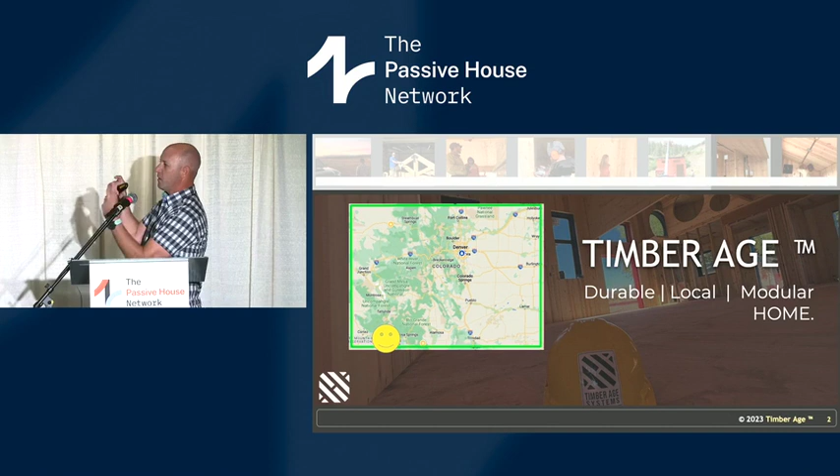We're Timber Age Systems. We make durable, high-performance, modular, panelized homes in Durango, Colorado. The best part is that we often go from the forest to our factory and back into a building in less than 40 miles. Everything we do fits underneath the smiley face you see up there on the map.

I get the privilege of telling you how Timber Age started. I have an 18-year-old who's in her first year of college. I want everybody to close your eyes and view yourself as an 18-year-old. The fact that there aren't many people in here under 18 is something we should probably consider. Think about your 18-year-old self — would they be surprised at all about where you're at right now? I know my 18-year-old self had no idea what I was going to be doing at this point.

I graduated with a degree in aquatic ecology, then taught high school for a while, and then jumped into manufacturing, which is really what I am. I'm a manufacturing geek who discovered Passive House because of the problems I'm trying to solve in my life, and you'll hear a little more about that.

The best part about all of those things is I got to work on really amazing teams, and we did great things together. I had organizations that invested in me, and mentors who changed the way I look at work and life forever. It shaped how I think about what it is to be in a place and belong to a team.

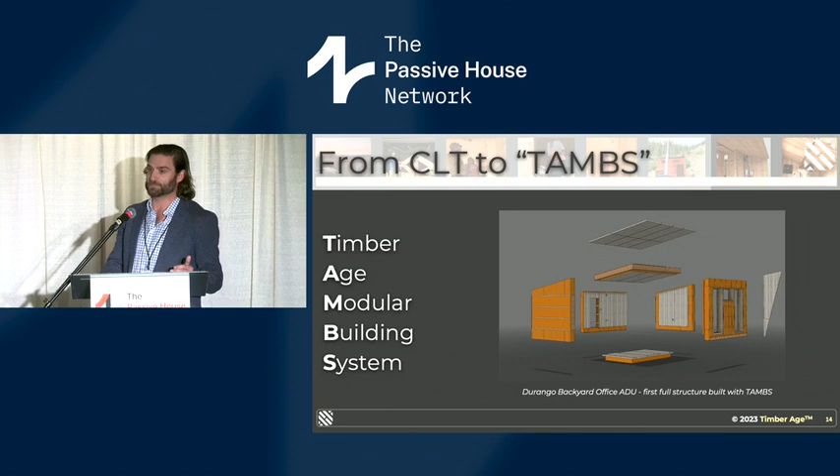In early 2023, we rolled out the next phase of Timber Age, the Timber Age Modular Building System, or TAMBS, as we like to call it.

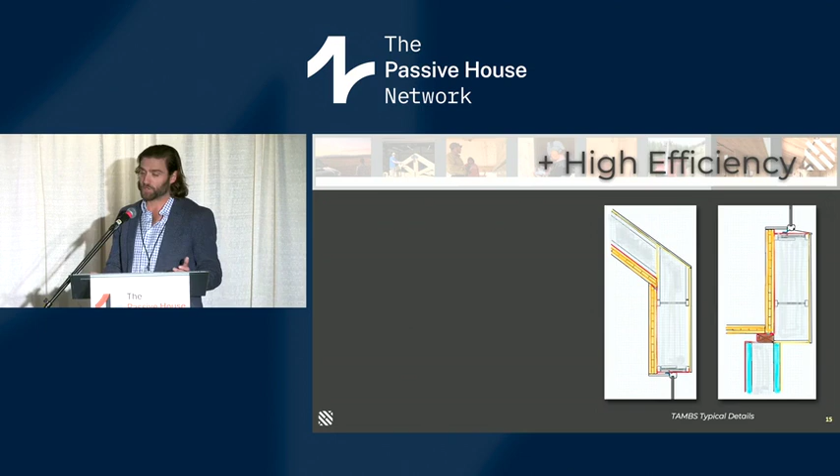Most of us here are building science geeks, at least we're aspiring to be. We have to consider the efficiency of the design and the operational carbon of our buildings. But too much focus on assembly performance prevents a balanced consideration of the total impact of a structure on the environment. And that total impact is super easy to measure, right? No, unfortunately it's not super easy to measure, but we have to try.

One of the more tangible ways we've chosen to consider this tough idea is to focus on miles traveled per pound. If I can produce structural wood, which is a pretty heavy component, from only 15 miles away, isn't that a little bit better than 1,500 miles away?

While we understand the embodied carbon discussion is far more nuanced, and I think Chris can help us out with that a little bit more, I think we can all at least agree we need to start with metrics that are easy to measure. But regardless of the metrics, we need to use both lenses to achieve the greatest impact in the shortest period of time.

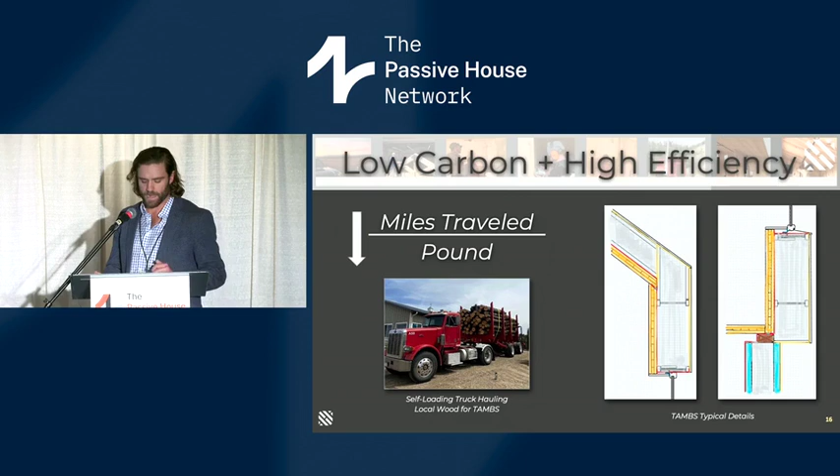A big part of why I'm here today comes from working with Passive House at scale in New York City for many years with Steven Winter Associates.

Modeling the performance of large buildings is critical to facing the climate crisis, but as I'm sure many of you know, the number of variables in the data can be overwhelming. The timeline and the carbon-intensive materials can be very daunting.

It left me searching for more control over the process. I began to wonder, how can we build housing quickly enough to keep up with a growing population and do it with a laser focus on energy efficiency and embodied carbon?

But also, how can we get people excited and educated about passive house and low carbon construction as fast as possible? Obviously, there's no silver bullet, but after a few months of searching, I came to the realization that CLT, and in particular small-scale CLT production, has the incredibly unique ability to approach these problems and bring together a few of the things that I was already very passionate about.

CLT is—we love Venn diagrams, by the way, if you can't tell—easy to standardize and manufacture with the use of CNCs and modern technology. It lends itself to durable passive house construction. And if done on a small scale, it has the ability to utilize local, low-value trees and aid in our fight against the growing wildfire crisis.

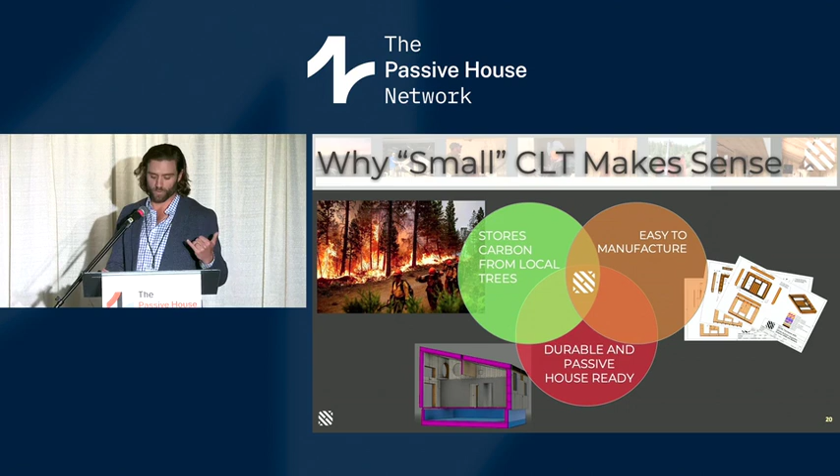This relationship is incredibly exciting to me. But after years of trying to sell and educate about passive house, I've learned that it's time to bring in the big guns if we're really going to move. And nothing sells better than Instagram.

CLT just looks and feels good. We now understand the health benefits of biophilic materials in our living and workspaces. And when that material has a cool story, is fun to work with and design with, and makes you feel good, that is something people can really get excited about.

So what do I mean by easy to manufacture? Developing a manufacturing process around CLT is incredibly efficient. Our shop drawings dictate how our assemblies go together, but our CNC transfers the majority of our instructions right onto our 5-foot by 10-foot CLT panels. All of our insulated wall, roof, and floor assemblies get built in a similar way.

A vapor open air barrier is adhered to the CLT, and wooden I-joists connect the individual panels together. This cavity then gets wrapped with our vapor open weather barrier and filled with 12 inches of dense pack cellulose to achieve about R52. With this level of control and pre-planning, projects get installed and weather sealed in days instead of months, and the efficiency is built into the system and is preserved.

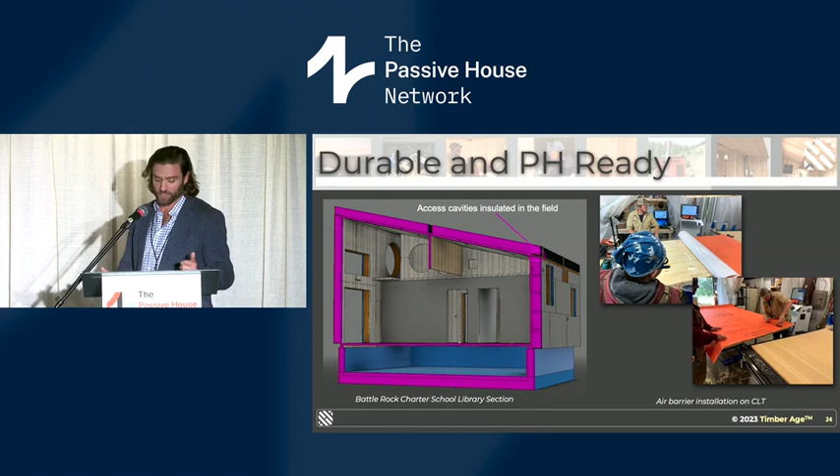Now there's no wonder why so many designers have chosen to combine CLT construction and passive house, even those who aren't just completely obsessed with whatever the Europeans are doing. Having a continuous thick structure creates a very effective substrate for applying an air barrier and provides an uninterrupted structure for attaching insulation with minimal thermal bridging.

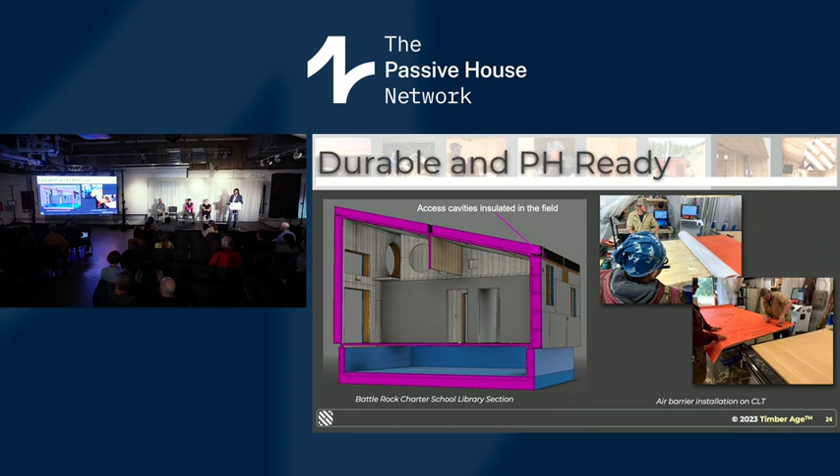But on top of all of that, the ability to utilize wood that would otherwise have gone up in smoke, and still touch and feel this beautiful material for the life of the building, is hard to beat.

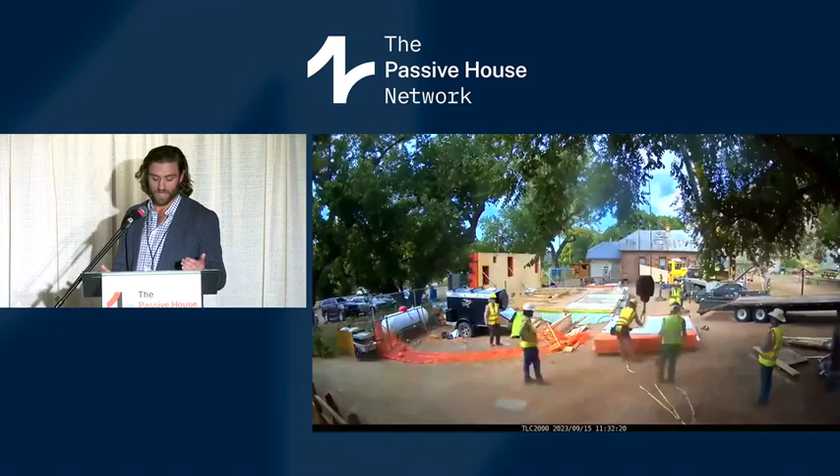This building we recently installed will be the library for students of the Battle Rock Charter School near Durango. The whole building went together in 3 days with windows installed and weather sealed. Barely any trash was produced, and the only stressful feeling we had was that we may have had too many people on site.

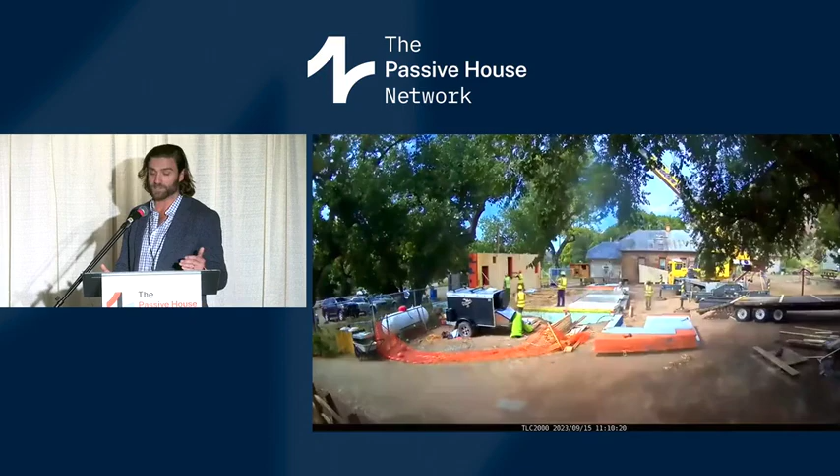Needless to say, the students and teachers are ecstatic about this library, but the people who enjoyed it the most were the installation team. And that's not a beer in my hand, that's a seltzer.

We also know that our system lends itself to the growing interest in small backyard ADUs. This backyard office was recently completed in Durango after making a quick trip to Washington, D.C. for the Innovative Housing Showcase put on by HUD.

Housing and Urban Development, thanks to funding from the U.S. Forest Service, where we were able to share our story with our representatives in Congress, as well as the general public.

Next month, we will be building our first certified passive house, the Hemlock House, that's going to New York. This will also be our first single-family home, but will serve as a model for a simplified structure that could easily be built upon to create multifamily housing.

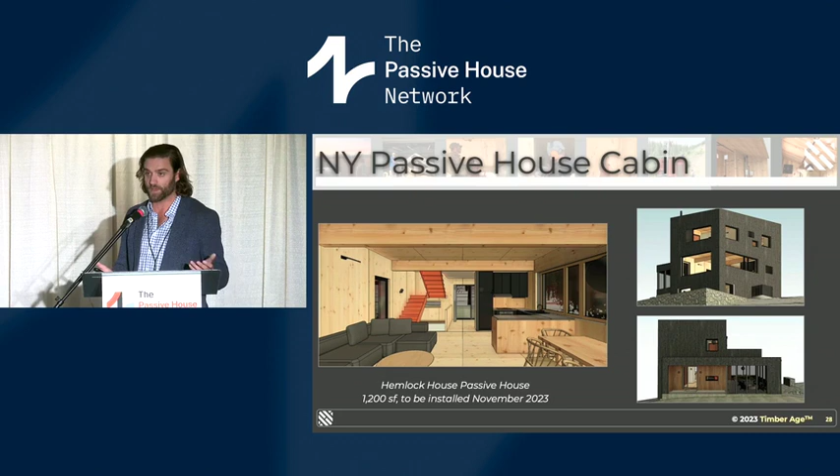But as we keep mentioning, our ultimate mission is to create affordable housing, which is a great need in both rural and urban areas, as Kyle has discussed.

We recently developed the Linear House, a fully designed, affordable model priced at $300,000, meant to house a family of 4. Right now we are working on getting this to be the basis for a 50-unit affordable development nearby Durango in the coming years. But our hope is that it could also be a repeatable, replicable design sent to rural communities around the country.

So with that, how do we see Timber Age growing beyond Southwest Colorado in Durango? What is great about our mission that Kyle described is that it gives us some pretty clear direction. First, our typical plant design is about 5,000 square feet, and it is small enough to go pretty much anywhere.

It also needs relatively simple machinery, requiring only about $1.5 to $2 million to get off the ground.

As far as where to go, we are guided first by the 32 million acres that the U.S. Forest Service has identified as high-risk fire sheds that will need to be thinned over the next 10 years. They have no idea what they're going to do with all this wood that has to be cut down to help deal with this wildfire crisis, which is why they're so invested in what we're doing.

For these areas, it is not a matter of if, but when they will burn. And if we don't thin them now and come up with creative ideas to store all that carbon, we are just going to keep digging a deeper hole.

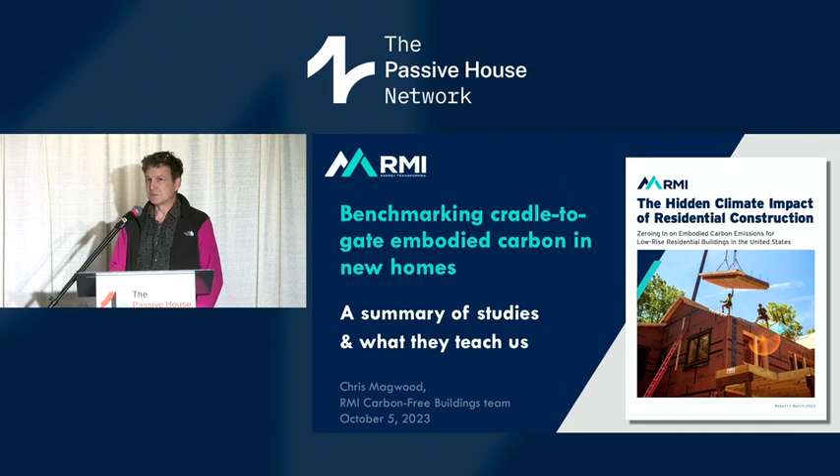So in 2011, I thought I'd just quickly measure the carbon footprint of the materials in our next building project. However many years later it is from 2011 till now, I'm still trying to measure the carbon footprint of materials in buildings. It's gotten a lot easier since 2011, but it's kind of been the rabbit hole I've gone down. Now that I have slides here, I'm going to spend a pretty short amount of time running you through at a very high level some of what I've found in the last 10 years or so.

The real takeaway here is that, as you guys alluded to, this is not a trifling part of the climate crisis, this is pretty central to it. From what I've been able to figure out, the emissions that go into the atmosphere just from making building materials, just for low-rise residential buildings in the US, is about 55 million tons per year. That's on the scale of the entire emissions for some fairly major European countries like Austria, Greece, and Norway. So collectively, this industry is responsible for a huge pile of emissions. That's also about the equivalent of the output of 13 coal-fired power plants in a year. So it's not a small problem.

As the work that everybody in Passive House has done to influence the fact that energy codes are getting stricter, and the energy grids are cleaning up, this chunk just sits out as a larger and larger piece as the operational side gets smaller and smaller.

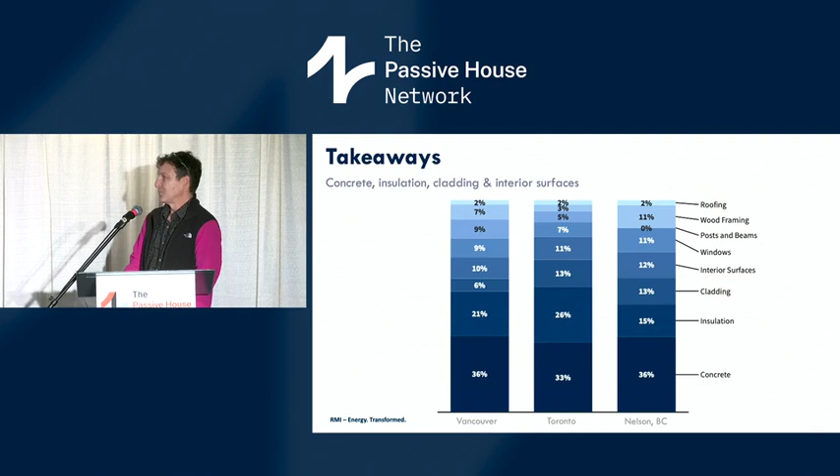So that was, if you add up all the emissions from all the materials. What we're able to see too from this snapshot is that the distribution of where those emissions live in the building is pretty common across all of these buildings. About a third of it belongs to the concrete, somewhere between 15 and 25% belongs to the insulation, and then 10 to 15% on the cladding, and so on up the scale.

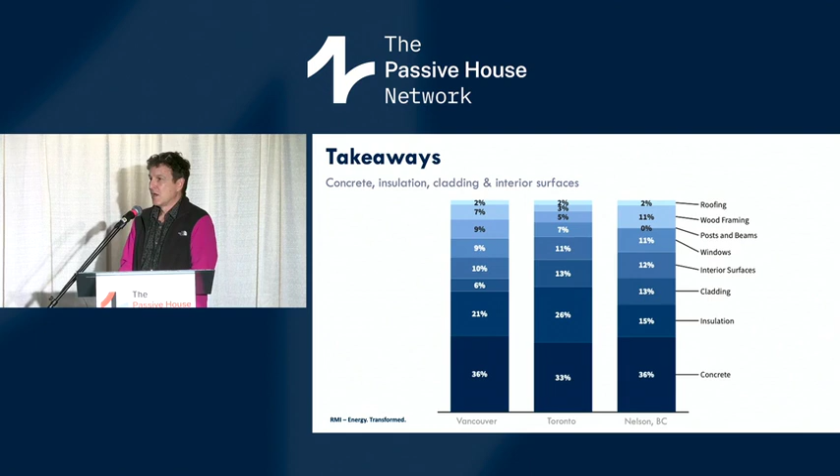But it didn't really matter what part of North America they were in, didn't matter what level of code they were being built to, those distributions stayed pretty constant. So if you are a builder and you are trying to think, I should do something about my embodied carbon, it's pretty clear: if you address it in your concrete, your insulation, and your cladding, that's where you're going to. I liked in the previous session the boulders versus the gravel analogy. Our boulders are the concrete, the insulation, and the cladding.

Some terminology things that I wanted to show, because I think thinking about emissions from materials is new, and you can think about it in a bunch of different ways, and I wanted to run through those with you. One is to just add up the emissions for all the materials in any given building, and there's just a net answer.

So usually expressed in tons of carbon dioxide equivalent. That's great for what I did in that first slide - saying all the homes together add up to this many tons or millions of tons of emissions. It's great for governments to start getting an idea of what their new housing stock is going to be responsible for. Building companies are going to use that kind of whole building number for their ESG reports. But it's sort of like saying you can say how much energy a building uses, but a big building might use a lot more energy than a small building. So we can also look at intensities with embodied carbon emissions.

One way of doing it is looking at net emissions by conditioned floor area. Those are the results I gave you from the studies, in kilograms of CO2e per meter squared of conditioned floor area. That helps us normalize for the size of the building, helps give some benchmarks and targets to aim for, regardless of the size of your building. And it does it in a way that prioritizes living space.

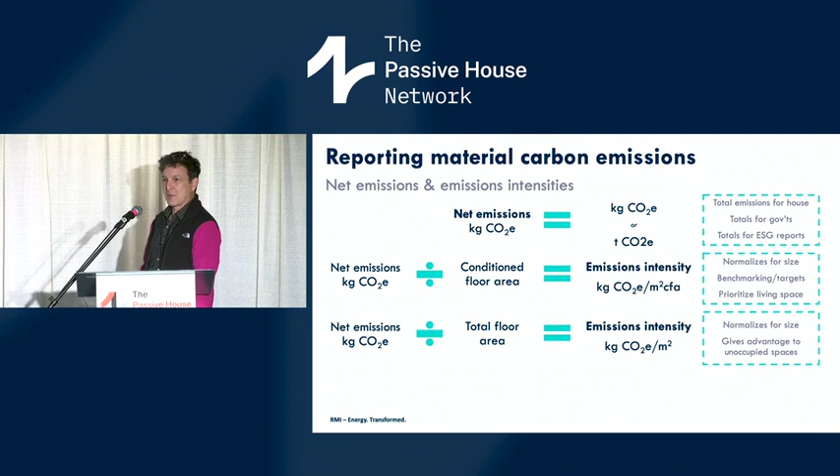You could also just look at it as an intensity by total floor area. That's what we started doing with our studies, until we realized garages and unfinished basements tend to have less embodied carbon because there's less insulation, less finishes, no interior partitions, all that kind of stuff that can add up. What we realized was, especially in the Toronto region, the houses with massive 3-car garages, if we just did emissions by total floor area, got the best results. You could sort of fool the system by building a whole bunch of useless space at a low carbon intensity. So we switched to looking at it by conditioned floor area.

So, prioritizing living space instead of unoccupied space.

And then also, mostly with the City of Vancouver, we also looked at net emissions per number of bedrooms as a proxy for occupants. You could make a 10,000 square foot house for 2 people with a pretty good low kilograms per square meter, but it's still a massive house. So, thinking about intensity per occupant is another good lens to be using.

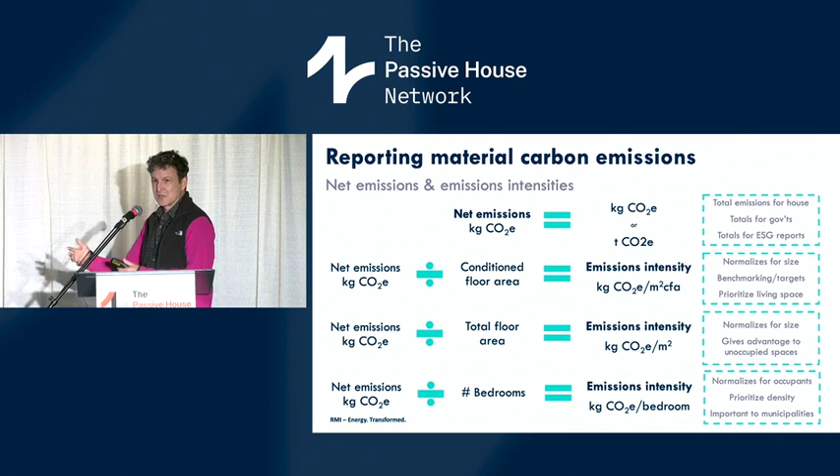None of these is the better way or the right way or the wrong way. I think it's really important, if you are starting to get into measuring this, to measure it in all of these ways. Depending on what you're trying to solve for, one of these metrics might be better than another.

Lindsey mentioned that I was part of the team that developed this BEAM tool, which is an estimating spreadsheet. It's free, and it allows you to make a pretty quick, easy, and straightforward model of a building. This is the tool that's behind all of those studies. I'm not going to talk much about it, but I'd encourage you to go access it and play around with it.

I also want to be clear that in those studies, we weren't tackling all the embodied carbon emissions in a building. We were tackling a bunch of them, but not all. What's included in those numbers I've been showing you is basically the structure, enclosure, and partition materials, kind of everything highlighted in green over there on the left. But we did not include some pretty big categories like mechanical, electrical, and plumbing materials, fixtures, appliances, surface finishes, all kinds of things that would actually be adding to those totals.

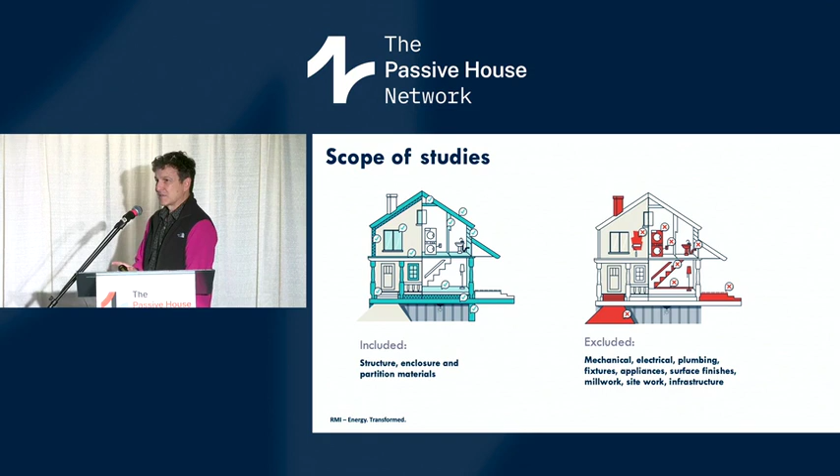So when I'm saying a typical building is maybe 200 kilograms of emissions, that's 200 for the stuff on the left. It's not including the stuff on the right. The biggest reason we didn't include the stuff on the right is that even up until a few years ago, the amount of available data on those kinds of materials was pretty thin or non-existent, but it's getting better all the time.

Some of the standouts in the materials we haven't counted so far: paint. If you look at that list, paint outweighs all the mechanical and electrical materials. That was a bit of a surprise. We don't really think about that. But boy, we put a lot of paint on a lot of surfaces in a lot of buildings, and there's a couple of tons worth of emissions in a normal house just from the paint.

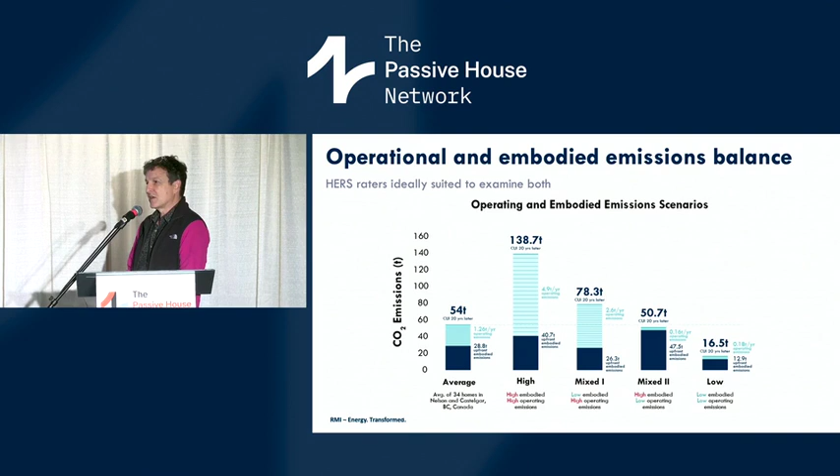I think it feels like one of the next steps in the practice of doing passive house is starting to add this dark blue bar onto your analysis, and make sure that you're not doing the thing of, oh, I knocked all the operating emissions off of this house, but I did it at the expense of a huge amount of embodied carbon. Really, we want to make sure that both of those things are as low as possible, and that's how we win.

We did a really interesting study for Doug Tarry Homes, a production building company in Ontario. I think they do about 500 homes a year, so they're not massive, but they're not tiny. It's a great example of the insight that an embodied carbon analysis can bring to a builder. So we took one of their models and did the embodied carbon as they build it, and you can see it was about 66 tons as built. Then we used the BEAM tool to iterate on that design.

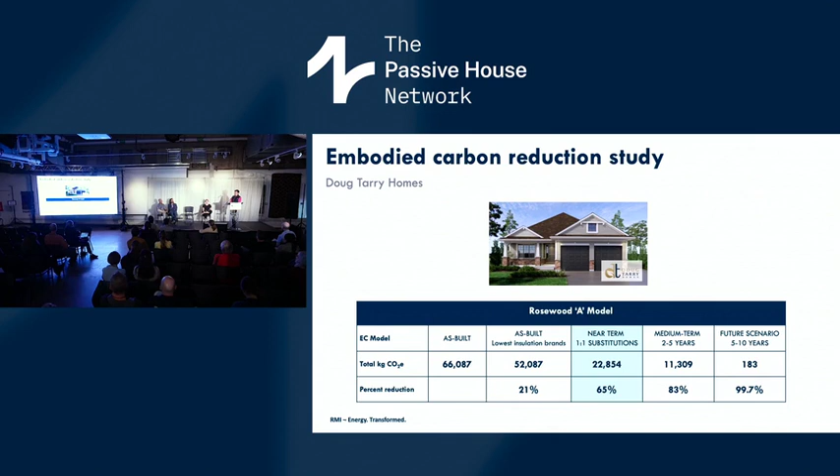We changed nothing about the design, the shape of the house, the size of the house, all of that stayed the same. But the first thing we did was identify for them that there's a bunch of insulation materials where they're using the highest embodied carbon version of that product. If you just switch to the lowest embodied carbon version, there's a 20% reduction on the table for you. No difference in how you're assembling the house, even what material you're buying. That's a procurement choice that could make a 20% reduction.

They wanted to know: in the next 5 years, if we were to switch a whole bunch of our products to the best things we could switch them to, where could we get to? That's the one that's highlighted, which we called the one-to-one substitutions. You can see we got it down to just under 23 tons of emissions, so that's a 65% reduction from where they are today as built. And again, that's just straight up product swapping - switch from your mineral wool batts to cellulose, switch to a lower carbon concrete mix. Not things that are way out of the realm of possibility.

Everything we tried to do for them in that one-to-one substitutions had a cost parity, and everything was available in their Ontario market. So very achievable, and you can see there, about a 65% reduction.

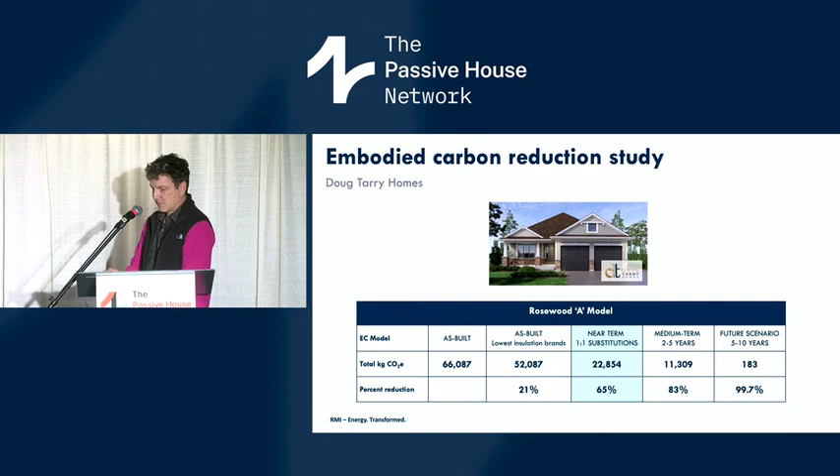Then, looking further into the future, we start suggesting things where either the products are less available, maybe don't have their code compliance stuff in line yet, a few small design changes. But again, pointing them to the fact that within 10 years they could actually have a zero embodied carbon home - and they were the first Ontario production builder to be doing all net zero homes. So they could be at that level on embodied carbon with some foresight and planning.

For those of you in the business of helping inform builders on how they can decarbonize, I feel like the embodied carbon thing still kind of freaks people out. They're like, oh, I don't know what to do, I don't know what products to use, it all feels really overwhelming.

My strategy, what we did with Doug Tarry and other developers we're working with, is: just find one thing a year that you can reduce. We still have, it's one year less since I made this slide, but 6 or 7 years before 2030 - if you want to get a 40% reduction by 2030, you're only looking for a 5% reduction in your embodied carbon every year. And that's really achievable.

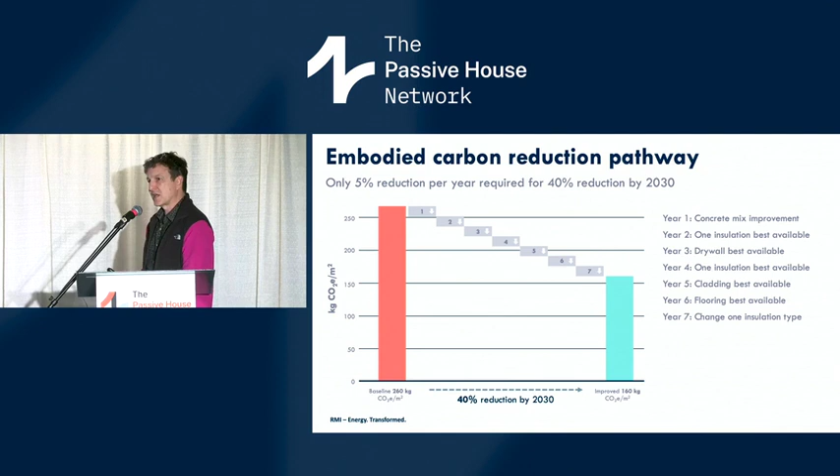Talk to your concrete supplier - for sure you can knock 5% off your total embodied carbon emissions by speccing a better concrete. Look for a better insulation, find the best in category drywall product. These sorts of things, I'm not trying to make that list a prescription, but just trying to point out that these are really approachable changes, and nobody needs to go find 40% at once. You can find it piece by piece over time and still make a really big difference.

I'm just going to end with a couple really quick case studies. Happy to talk more about these with folks after, but these are just a couple examples. I chose these two because they both are passive house buildings. So we know that on the operating side, they're both electric and passive house, doing as much as they possibly can operationally, but these are projects that we're getting really great results in terms of their embodied carbon.

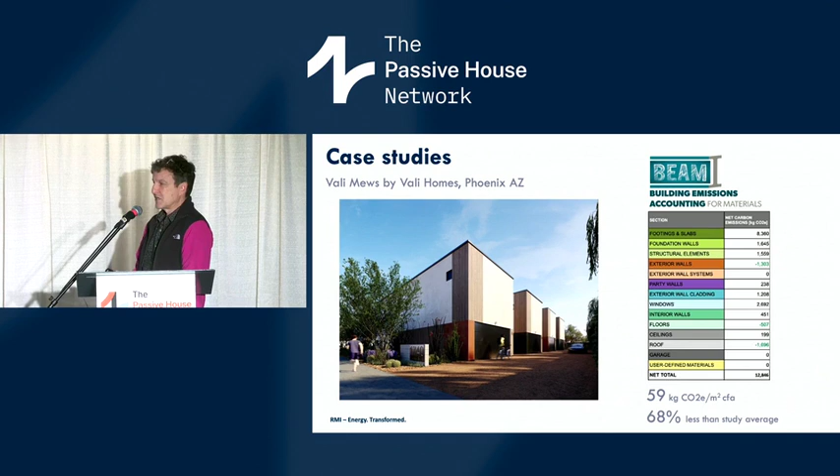This set of 4 homes in Phoenix by Vali Homes had embodied carbon of 59 kilograms of CO2 per square meter. I don't know if you remember back to the early slide, but 200 is an average in North America, and the best result we saw in all of our studies was 72. So 59 is really exceptional.

The embodied carbon space right now is where passive house was 20 years ago, with most of the industry going, you can't drop it by 80%. And everybody in passive house going, yeah, you sure can. And everybody saying, oh, but it's going to cost more, it's going to, all the stuff.

I'm hearing exactly that same conversation now around embodied carbon. And I'm saying, here's somebody who is getting an 80% reduction. They did it affordably, they met code, all of that stuff. The arguments are pretty cyclical, but I feel like embodied carbon now is sort of where passive house was maybe 20 years ago.

So if we were able to get to the level that Vali Homes and New Frameworks are doing, we're talking moving that total number for the US from 55 million tons down to about 13 million tons. That's like shutting down 100 gas-fired power plants. So that's no small impact on the national emissions picture.

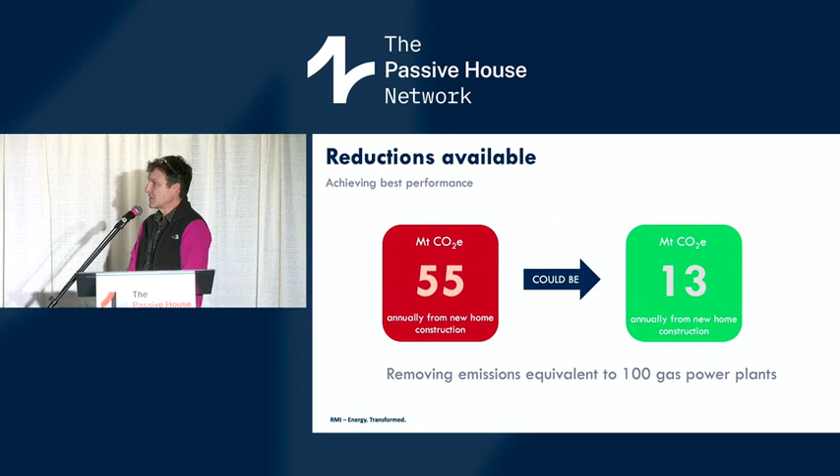It's pretty big, and I think it's well within the wheelhouse of anybody who's been in passive house, who's into numbers, into measuring, into figuring out how to optimize. I feel like diving into embodied carbon would probably suit your personality type. And there's a lot on the table right now in terms of what we can do for the climate if you dive in and do that.

I'll just end by saying that the project I'm working on right now is with RESNET, and we are coming up with an ANSI standard for actually measuring embodied carbon, specifically in homes, and to do it in a way that works for energy raters. I think in the home building market, whether you're doing passive house or HERS ratings or using HOT2000 up in Canada...

Energy modelers are making exactly the kind of model that you need to do an embodied carbon study. There's not much more information that you would need to put into that model in order to get some really good embodied carbon numbers out.

What we're trying to do is get a standard out there quickly so that no matter what way you're looking at the energy modeling of a building, the way you would approach embodied carbon works in that workflow, but is also the same across all of the different energy rating systems. And I think if you want to dig into any of the studies that informed this work, there's a bunch of studies and references you can get into in more detail. But I think that's what I've got for you.